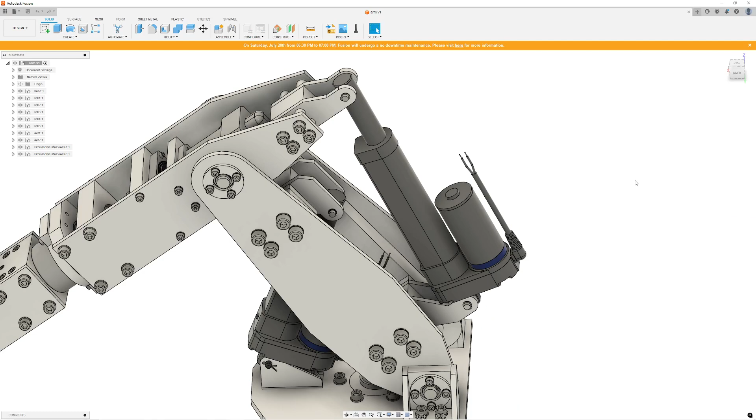So, downloaded it, and then inside here it's got the step file for it. So let's take a look at it. I'm going to use my 3Dconnexion SpaceMouse. This is a very old Space Mouse, so when I let go, you see it jitter like that. It's because the Space Mouse is bouncing, and it doesn't center as much as it used to anymore. This Space Mouse is very old. It's from like 2006, 2007.

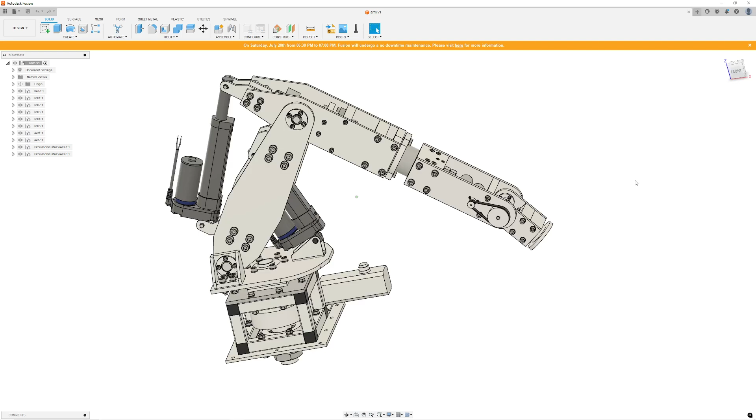Anyways, so as you can see, very detailed model. It uses linear actuators. There's 6 motors, and also a very complex head drive, where 2 motors are working in tandem to either pitch the head up and down or to rotate the head. So this is pretty unique to not have motors attached to the end effector and have the motors move around and worry about cables getting pinched and all these things. So if you count all the motors, there's 6 motors.

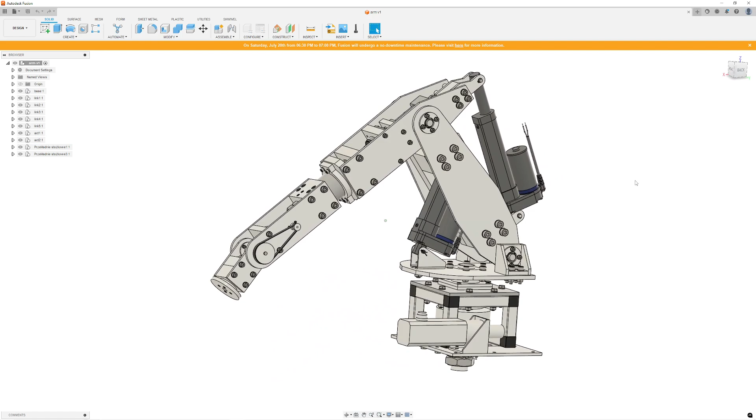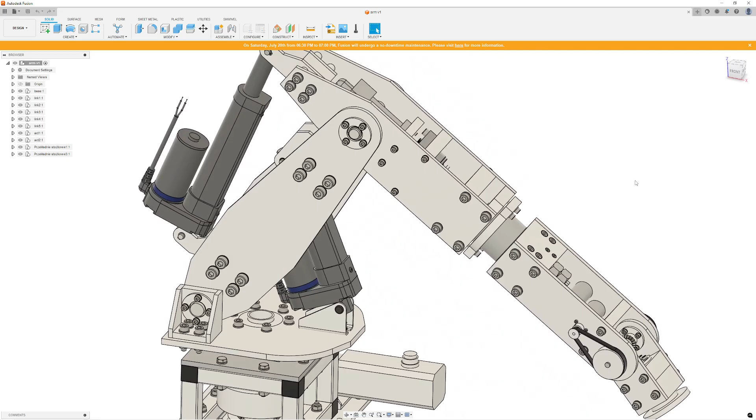But mainly we're here to look at the kit. But you can see very talented mechanical engineer to be able to go in here and design all these things. Obviously, I don't think there's any sort of assembly instructions or anything in there, but we can take a look through the file and see what's in there. So I just wanted to showcase this great work, and also to show the structure of what I'm talking about as a proper BOM inside of a model.

So here you can see on the hierarchy on the left hand side, how he has it kitted is it's kitted by links. So very logical. Okay, you got link one, there's basically 6 links, including the base. So 5 links and 1 base. So that's the six. So that's 6 degrees of freedom. So it's broken up at the joints of the degrees of freedom.

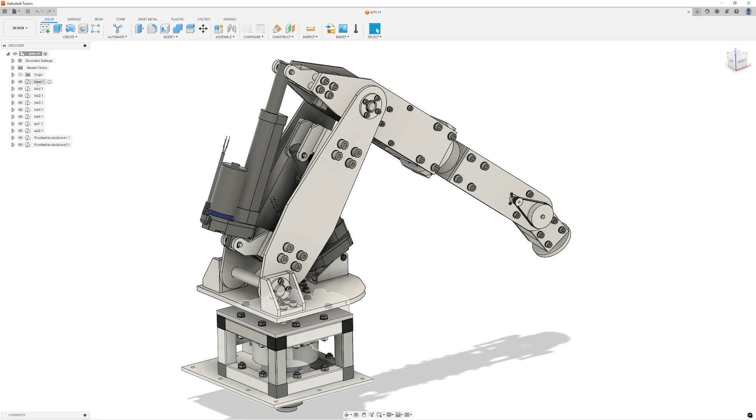So for example, here in the base, you can see that it has just the base, and it has all the screws for the base in the kit, all the components, the motor, the brackets, all the nuts and bolts, and all the hardware required for that segment is in that segment. Obviously, not wires here. Wires are not modeled. The belts are modeled, but wires are not modeled.

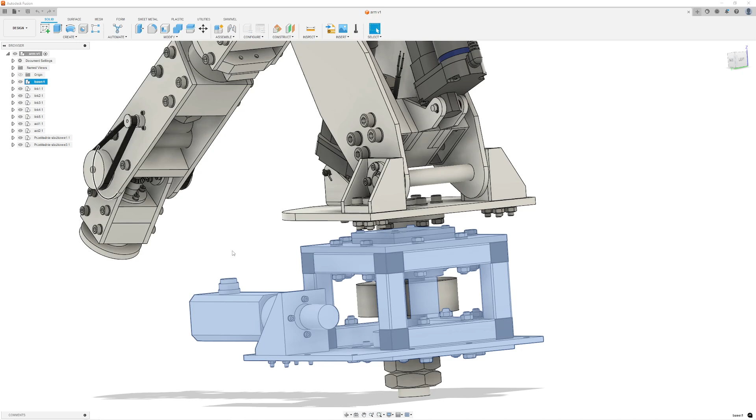So next, let's look at link one. So here, link one is the next degree of freedom. It's actually kind of the previous degree of freedom and the next degree of freedom. So right here is not modeled, but I guess there's some sort of belt where it twists.

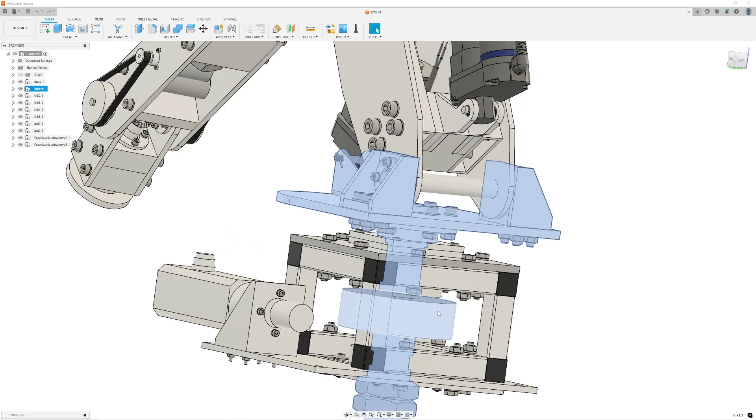So the belt is here, and then it twists this way, I think, or something like that, or maybe some sort of chain where it changes to perpendicular, some sort of flexible belt or something like that. And then this is some sort of pulley here. And then this guy attaches to the desk with a thrust bearing or something.

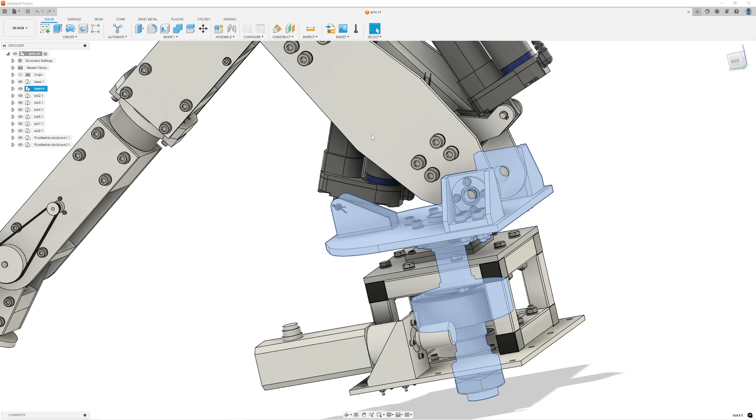Anyways, so basically here is from the first degree of freedom and then up to the second degree of freedom, and you see it's got all the cotter pins and everything, and see how it's got separation. So there's a separation between this motor, which actually the interesting thing is this motor is for this degree of freedom, right? So basically, how he did that is now he has that actuator here. These two actuators are separate.

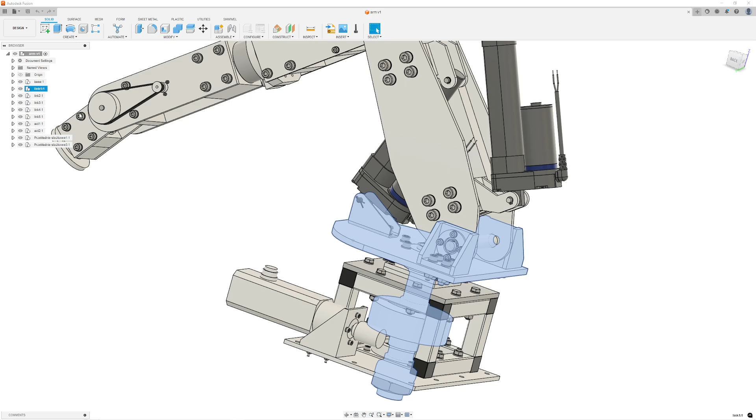So sure, maybe that would have made sense for you. You could make the argument that that should have been inside of this link one, because this is controlling that first degree of freedom that pushes this link up and down. So next one, we see the next link. You see it has everything in there, obviously except for the actuator, and also all the connections to the actuator 1 from link 1. So this is link 2. You can see it's got all the hardware there.

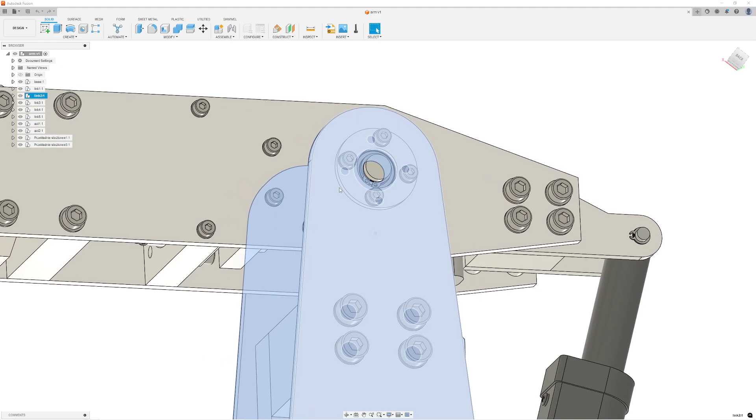And here is where you get the interesting bit. It's like, okay, how do you do the shaft? Looks like the shaft is part of the next link. So there's this hard break, and the break makes sense here. So technically, this little shaft is attaching link 2 to link 3, or in this case, link 3 to link 2. So that's how he's going to do it. But man, look at the detail. Even it's got the snap rings, right? Snap rings, all the washers, everything, right?

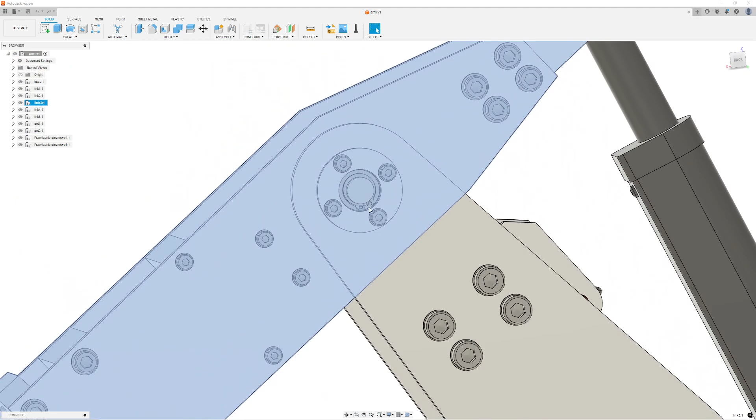So next one, link 3. So here you see link 3. It's got this next actuator all the way over here, actuator 2. And this actuator is the first one to be attached into a link. So you see it here. It's attached here. It even includes the shafts. Shafts are there, and it looks like another snap ring there, snap ring on the other side, and yeah. So then you see the screws.

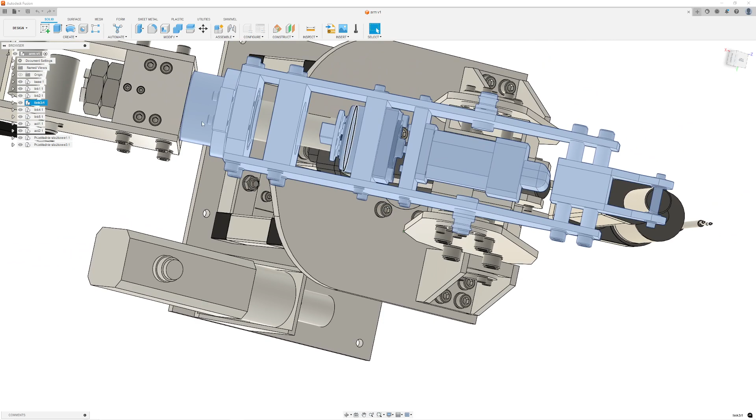All the screws are there, and then this is some sort of coupler, torsion coupler. Yeah, I think it's a torsion coupler, some sort of torsion coupler slash thrust bearing to keep the force off of the motor, so that you can take more load here. So the load is on the thrust bearing here, and also it looks like it's got a radial bearing shoved up in here, right? So it has all the components. You drop this down. Oh, okay, interesting. It's even got all of the screw DINs, right, and all of these different things,

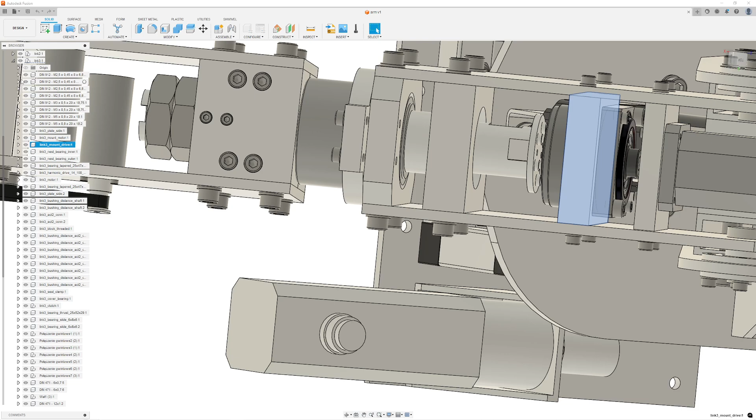and so also it's very well titled. You see here it says where it's from, link 3, and what it is with description, description, description. So if I went in and created a drawing off of this assembly, it's going to make a lot of sense. So I can do a link 1, link 2, link 3, link 4, link 5 BOM and drawing very easily, right? So I mean, this is really good work, right? And this may not even have been done in Fusion, but very good translation.

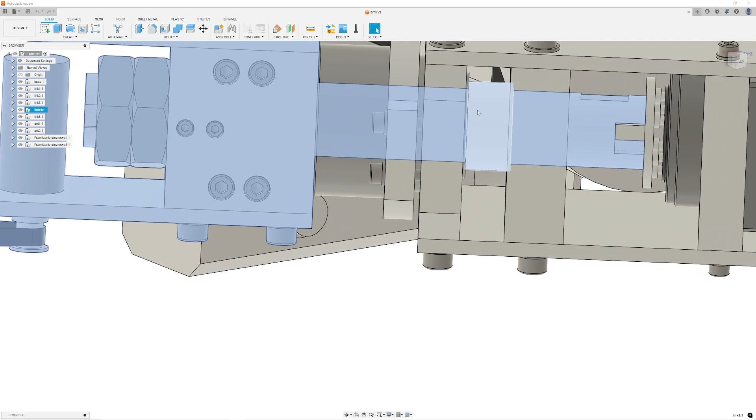So here you can see up to the torsion coupler here, and you can see how these are held in. Basically it looks like this is kind of acting like a thrust bearing, so it may have some back and forth here, and then it's held between these two bearings, and you can see he basically had this one in link 3 and then this one be link 4 because it's connected to link 4. Again, you can kind of argue back and forth about how that should be set up.

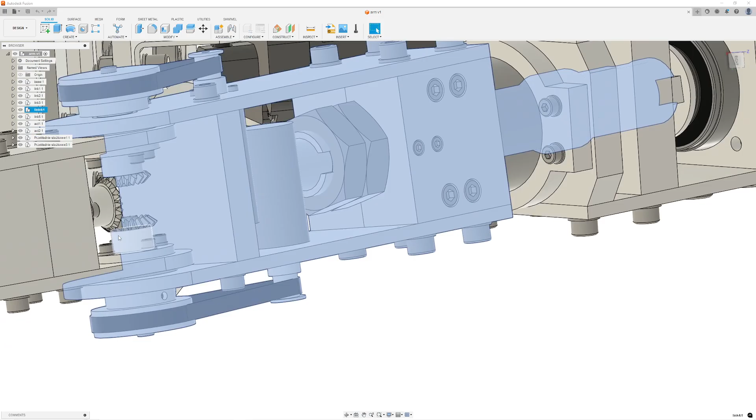So interesting here. So basically the pins itself, so this may be a, what's it called, set screw or something set up for the bevel gears. So he has the bevel gears here, and again, these are the two motors. One spins count.

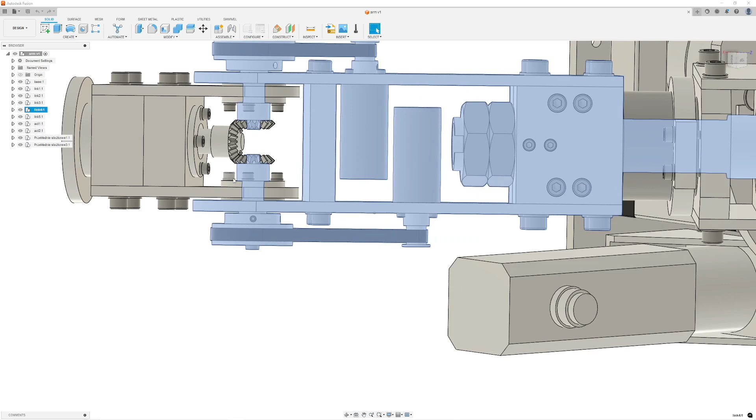I think what happens, one spins counterclockwise, one spins clockwise. If you do that, this guy purely moves up and down. This joint right here just goes up and down for this arm. If you have both of them rotate in the same direction, then this rotates, right? And then you have both of them rotate in the opposite direction. This rotates in the opposite direction.

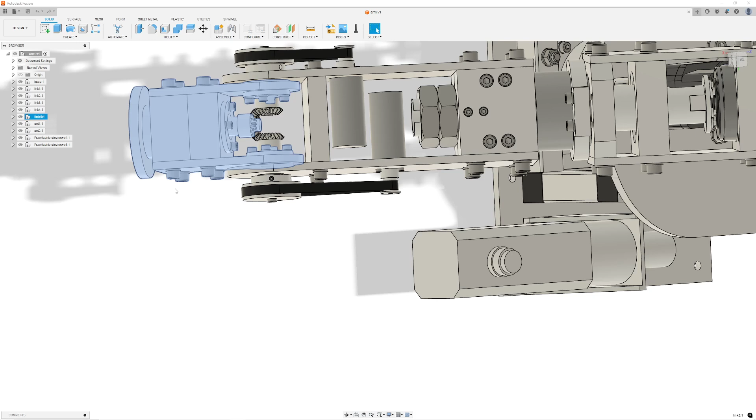So pretty cool that this has a nice and lightweight end effector, so you can increase your load. But as you can see, very beautiful here, link 5 exact. So when I'm going through this, it is basically exactly how I expect it to be, except sometimes the difference between the two links may be a little bit different than you would want it to be, but this is exactly how I would expect it, and it would be the easiest to document because it's like,

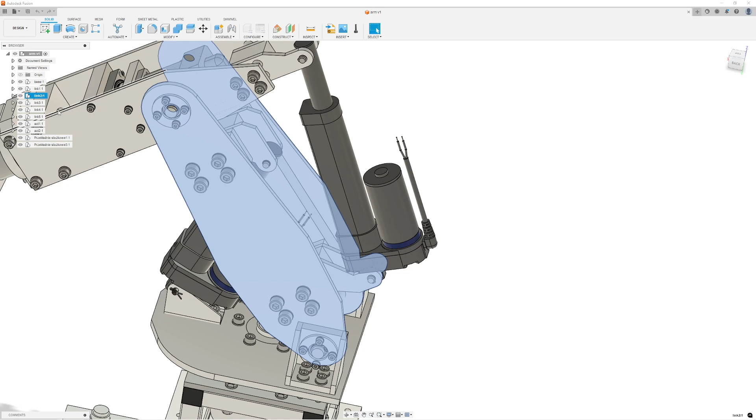okay, let's build the base. Okay, let's attach link 1 to the base. Okay, let's attach link 2. Let's attach link 3 to link 2. Okay, let's attach actuator 1, actuator 2 to link 1, 2, and 3. So link 1, 2, and 3, let's attach the actuators there. And then, okay, I'm on to link 3. Okay, let's attach the motor here and then attach everything together to get it to work.

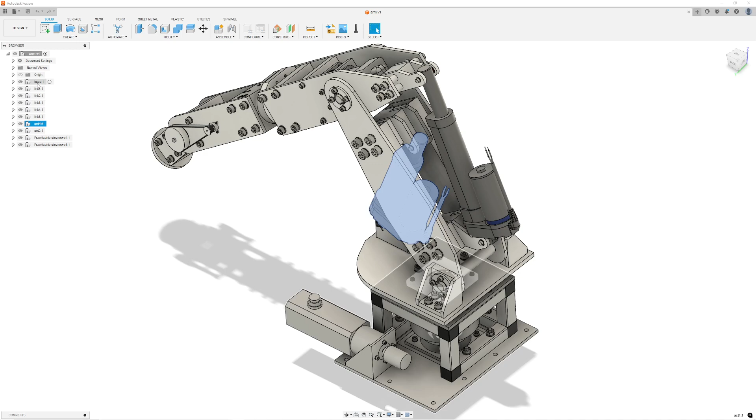So this is how a model should work. And you see it's very, very flat here. So we have only what, 1, 2, 3, 4, 5, 6. It's basically 6 kits and 2 actuators sticking out. And then you have the 2 bevel gears on the ends, right? Anyways, so very, very clean here. But let's take a look at what the BOM looks like inside the document.

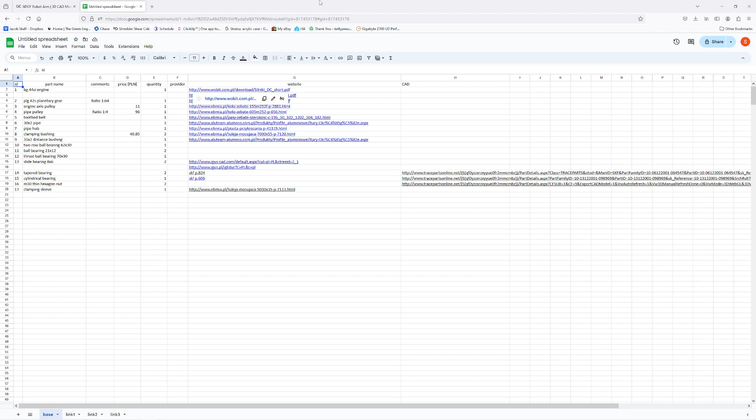So here I've loaded it into Google Sheets just to see if, hey, is this actually an issue that I see? So it's here in the tabs at the bottom. You got base, link 1, link 2, link 3, and it kind of looks like it's not really finished, right? Maybe I'm wrong, but it seems that it's unfinished. I would have to check. Okay, so he's using a brushless DC motor. Here's the part code, stuff like that. So unfortunate, right? I mean, maybe it is, or he has it in such a way.

So it'd just be base, link 1, link 2, and then you would have this be like level. So this would be like level, and then this would be 0, and then you would have this be like, what is it, arm. So this would be like your arm v1.0.15 or something. And then all of these are like level 1s. So these are your level 1 kits.

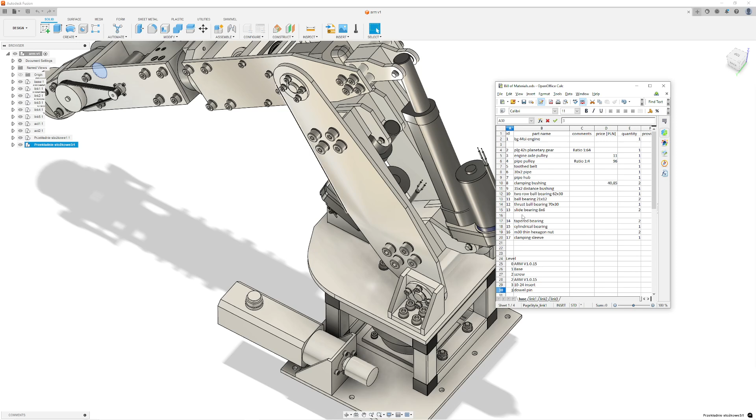And then you would have inside of here, so in this example, inside base, you would have screw, arm, and then maybe your arm has inserts in it or something. So then you'd have level 3, 10-24 insert, or dowel pin, right? Something like that. So that way, when the BOM's all collapsed, you have just these. So it makes it also easy to navigate your BOM. And again, I need to show an example. Maybe in the next video, I'll show an example of a collapsed and uncollapsed BOM.

So generally, you can have it collapsed such that you can group things together, and then you could click, for example, in Excel, you click a little plus, and then it opens up. So let's say I don't want to see any of this stuff from base. I want to look at link 1. I can hide all this stuff, and then it just becomes a flat BOM again. Base, link 1, link 2, link 3, link 4, link 5, and then actuator 1, actuator 2. So that way I only need to really look at what I want to look at the time.

So he's kind of doing that here. This is one way of doing it. So here's basically he has his overall assembly, and then you have these different tabs that you can go in between. It's just a little easier to have one tab and have the level. But if your Excel-based, sheet style software doesn't have that collapse and uncollapse, then you can do it this way by having tabs.

But imagine you have 30 of these. The tabs get kind of daunting to navigate through, the different tabs or sheets in this case. For something like this it's okay, but as it gets bigger, this gets a little unruly because it gets harder to read and also harder to navigate and harder to tell which one you're in without looking down here or having something in there to tell you.

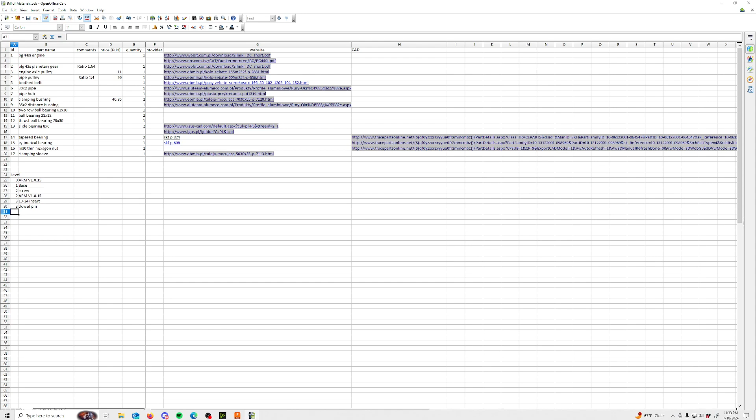And then this is what his file looks like here. Right, so I open the arm step, and it looks like it was part of some design accelerator. I think the GrabCAD library puts those out sometimes, those accelerators. So you can see some of these different things. So this was that main file right there.

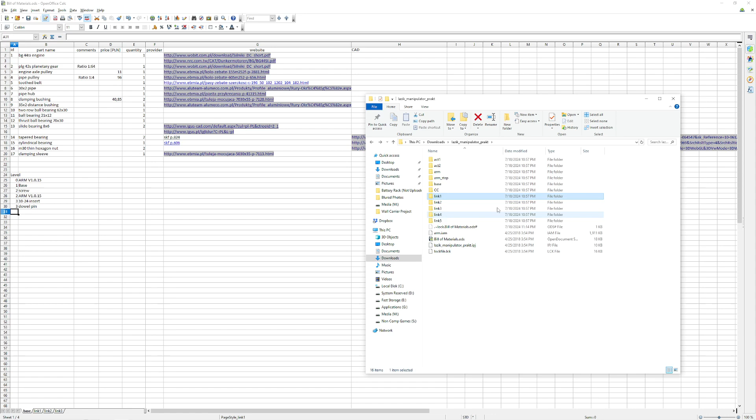And then inside each of these, he has all the different IPTs, so I guess this is Inventor because Inventor uses IPT files. I believe either that one or SolidWorks, I can't remember. So anyways, I just wanted to show you guys what I believe is basically a perfect, I'm gonna say it's perfect, not even Fusion 360, any sort of CAD system, flat BOM, right?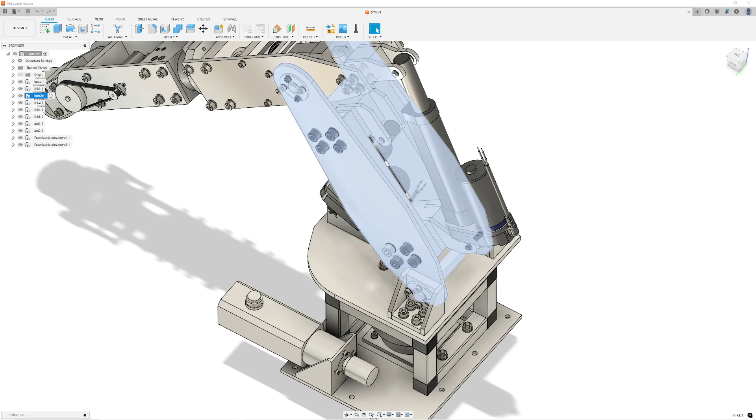It's very easy to navigate. If I say, oh, I want to look at all the parts for link one, bam, there they are. Oh, I want to look at all the ones for link two, bam. If I'm doing documentation, how do I write a procedure on how to build this, either manufacture in house or sell this thing as a kit? Very easy because I say, hey, here's my BOM. You see all the different parts, and that corresponds to the parts that I'm looking at in the model. And also, you can supply the model with the kit.

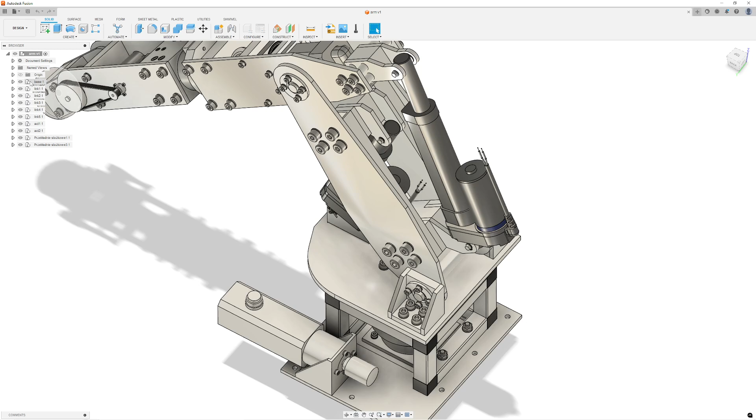Okay, so now I can go through and navigate all these, right? And it makes it very easy to navigate even if you're the designer and then you have somebody else do the documentation. It's very, very easy to do it this way. So you can see all the benefits of having it arranged this way. It just looks very clean, very professional, and easy to do all the documentation, all the post steps, more than just the modeling. Now, of course, you can always create an open part and then shove everything in there. So you can do this all at the end.

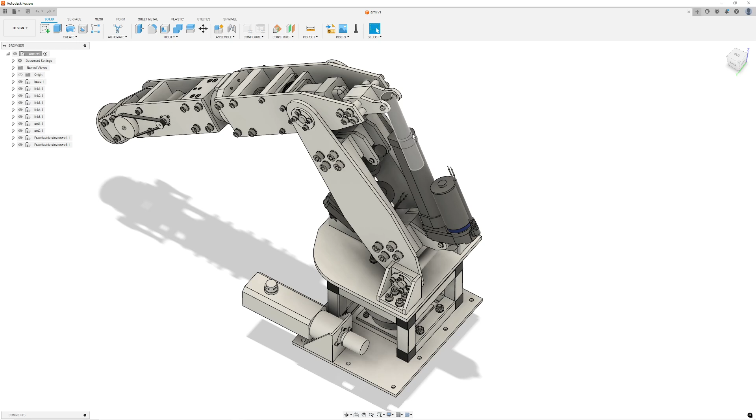You can fully design it and have piece parts everywhere and then have this be like 300, 400, 500, 5,000 pieces long and then keep dumping stuff in there. Obviously, it's easier to start that way from the beginning, but that's also something that you can do. So, anyways, just wanted to show you guys this. I caught it when setting up for my class, so I wanted to show you guys what a good example looks like.